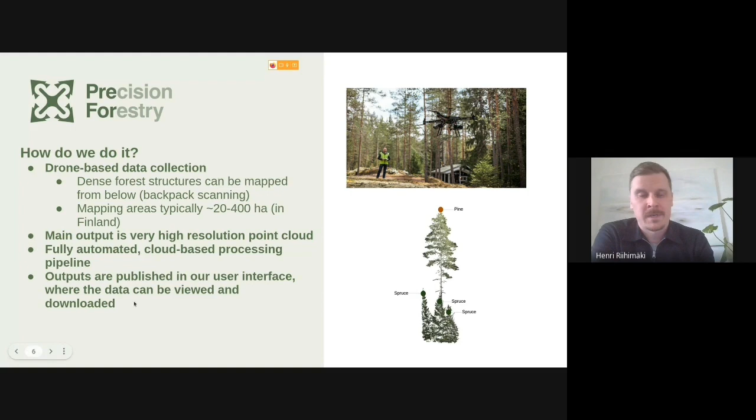In addition to that, we also get the compartments and the data aggregated into the compartments and management actions for these compartments. All of this is visible through our user interface where the data can be viewed and downloaded. The customer uses our user interface where he can see everything and then download desired data formats from there.

With the individual tree level data, we can see that the trees are clustered, and in parts of the compartment we have empty areas, and many other crucial details which can, for example, help in the planning of logging operations. I truly think this is really useful information, and it also gives us the opportunity to use any kind of geometry that we desire.

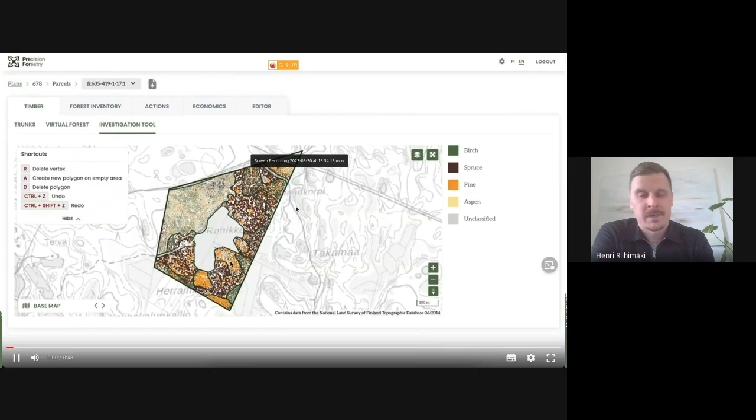There's no limitation in that sense, and we have also developed a tool for that. Here you can see our user interface and an example of the tool we've developed. Here you can see a compartment. The dark lines are the boundaries for a compartment, and let's say the user is interested in some specific area inside that forest and wants to check what kind of wood he has there.

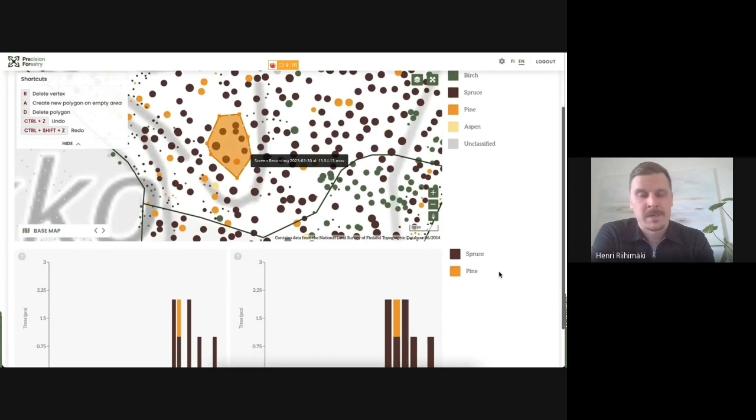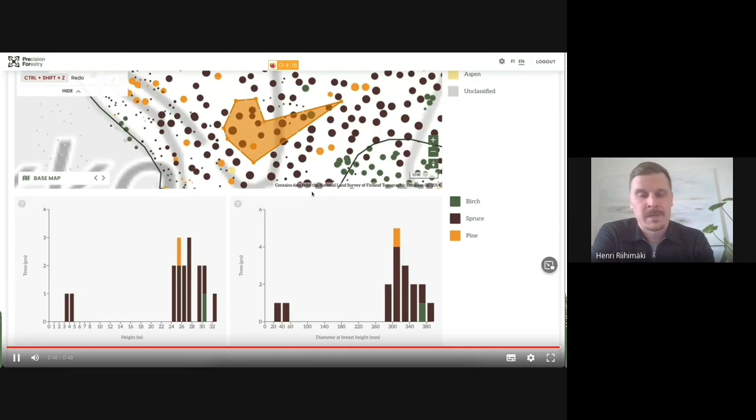By using our map functionality, the user can check in real time any given area and the tree size distributions. You can see the histograms showing the diameter distribution and height distributions, and they are automatically updated by the geometry the user gives to the interface. That's the whole point really.

This individual tree level data can be aggregated to any geometrical unit that we want to use in decision making, and that's really the key benefit from this.

Then the clear benefit we can also get is increased accuracy. By using this kind of high precision mapping, we are able to reduce errors compared to traditional methods. Our internal aim is to be below 5% error at compartment level in the key metrics, which include trunk count, volume, and basal area. Species detection accuracy for the Finnish use case is also 95%, so a 5% error margin there.

Luckily for us, Finland is a nice area to test this because we only have 3 or 4 main tree species here, but in that way it's good for us. We are just finalizing the evaluation of the inventory accuracy, and it's looking quite good. We are really close to this 5% error margin at the moment based on the latest internal data.

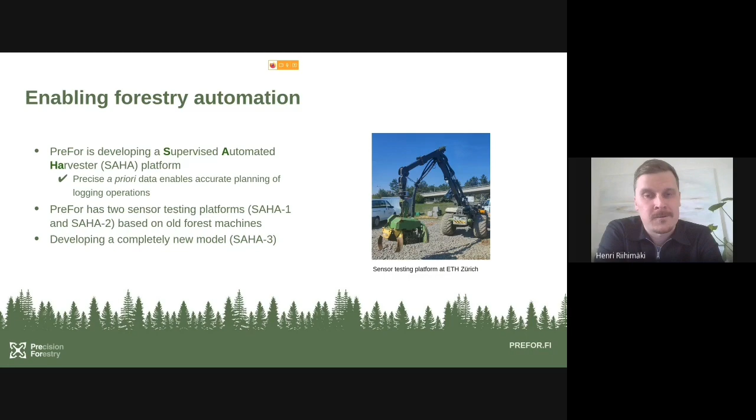And that's it from my part. Thank you very much for your attention.

Thank you very much, Henri, for a very interesting overview about your research and for sharing your work and your tools. There have been some questions in the chat, and one colleague was wondering on the tree level, how well can you distinguish different tree species in mixed, even canopy stands?

Well, in Finland, it's above 90% in most of the cases, depending on the situation, quite a lot. So overall, I would say it's between or around like 92 to 95%.

And this leads directly to the next question, which was how many tree species can you detect? And do you have more information for the individual tree, like the volume, the dimension, any other aspects related to biodiversity, which I think you mentioned already, but maybe you can give some more insights.

Yeah, so the basic attributes that we have for trees are tree height, crown width, starting point of the canopy, basically the height of the first living branch, tree diameter at breast height, sawlog volume, fiber volume, energy wood volume, and the total volume of the tree as well.

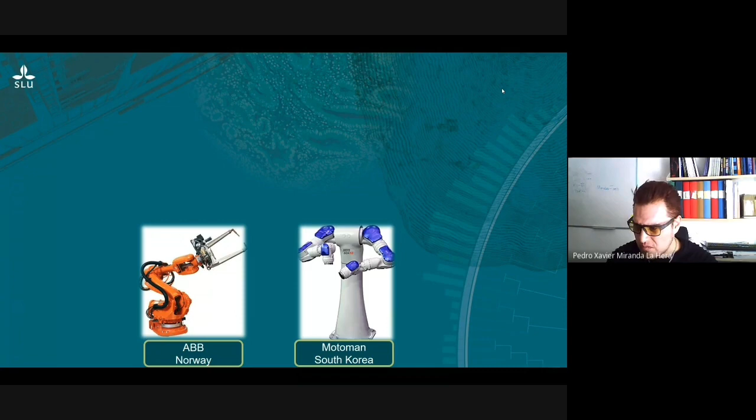Before working with forestry machines, I used to develop control algorithms for different robots, for example industrial robots in different countries, as well as different control algorithms for more complicated systems that we are interested in developing in the robotics community.

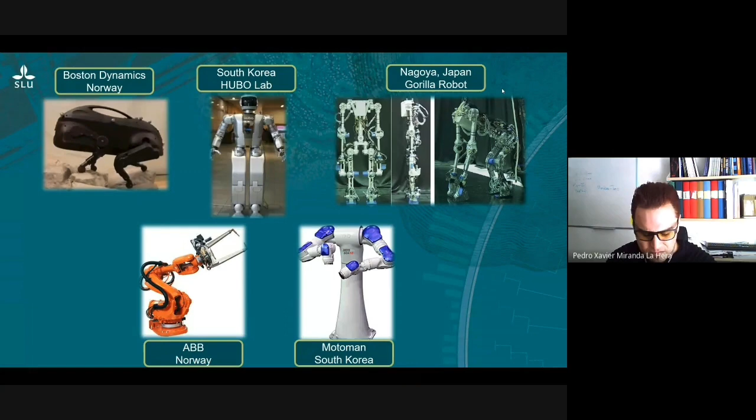But when I moved to Sweden, I became quite known here because I've been developing automation technology for hydraulic machines, specifically forestry machines. Over the years, I started a lot of different projects that ended up being products we can see today in the market from some of the most well-known companies out there, like Komatsu Forest, John Deere, and so on.

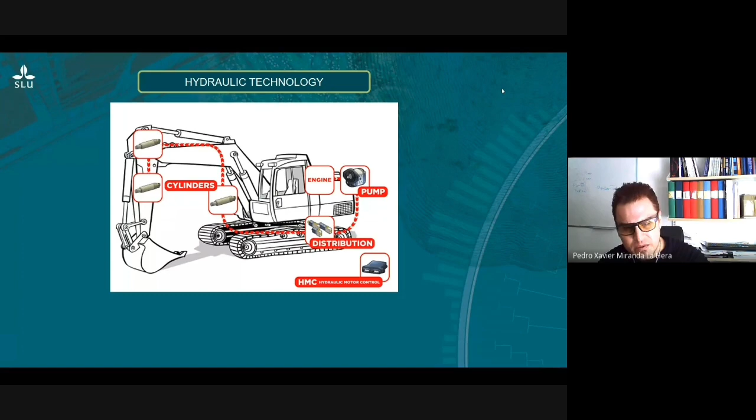As most of you know, forestry machines are basically operated through hydraulic technology - they have cylinders, pumps and so on. But there is a problem with most machines today: they don't really have real sensors, and by real I mean sensors that you can use for automation.

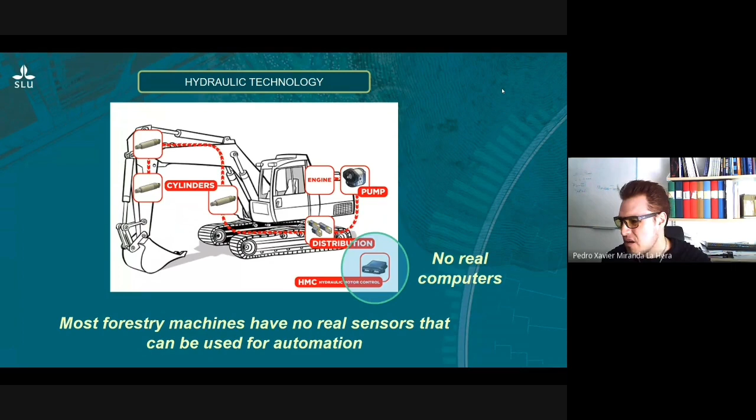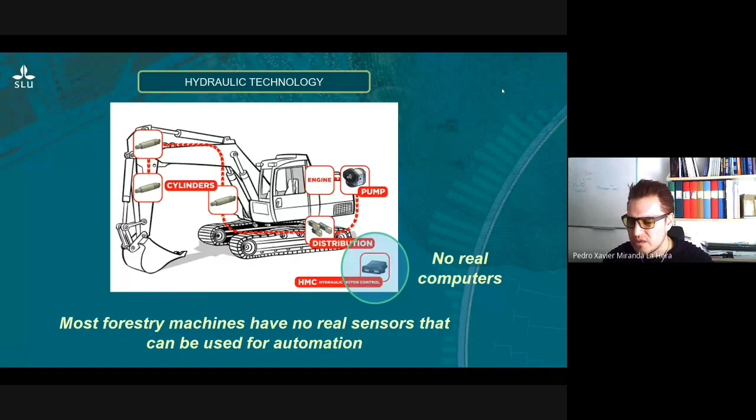They have some sort of sensors, but they usually cannot be used for automation. The second problem is that they have no real computers because they are usually manually operated machines - you don't need so much advanced software or computers to operate them. So there is a lack of technology in these machines.

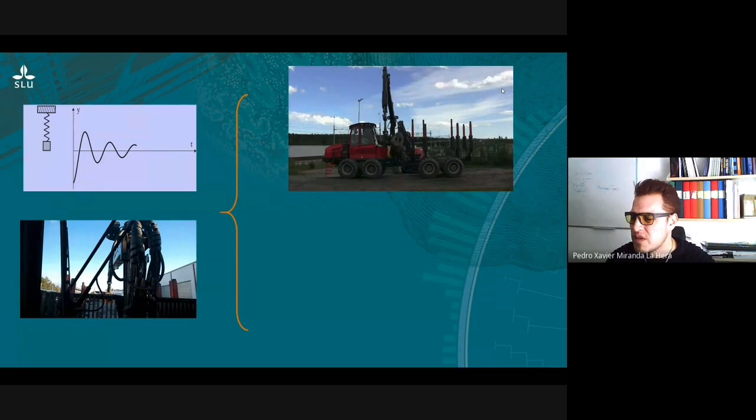The problem with that is that by nature, most of these cranes have this very bouncy behavior, which you can observe when driving the machine yourself. There will usually be a lot of oscillations and vibrations. That can provoke that whenever you try to do precise movement with these vehicles, you might not be fully able to do it unless you are an expert.

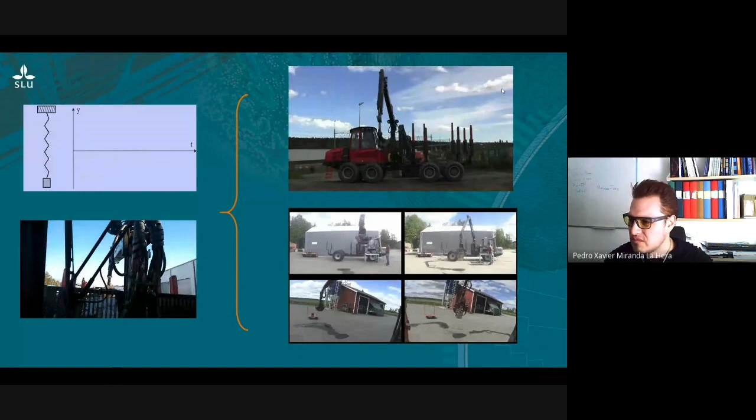One of the main reasons is that hydraulics hasn't really been developed as a method to fully actuate these kinds of systems. Originally, hydraulics were developed as suspension systems, so the technology to move heavy loads is kind of not too advanced in the hydraulic industry. One of the challenges I worked on for the last two decades is to transform these very uncontrollable oscillatory systems into something that can be controlled just like a robot.

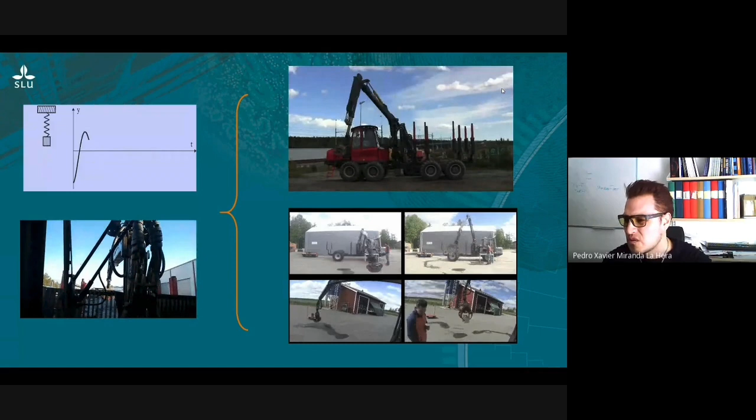And everything starts by introducing sensors on the machine. On these machines, over the last decade, specifically in 2013, the company Eaton released the first version of a fully sensorized valve, meaning this valve is not only capable of producing pressure and forces, but can also measure everything going on in it - pressure, flow, electrical lines, and all of that.

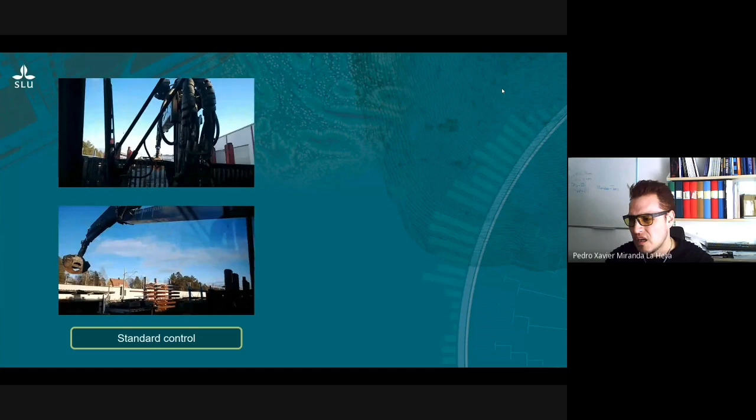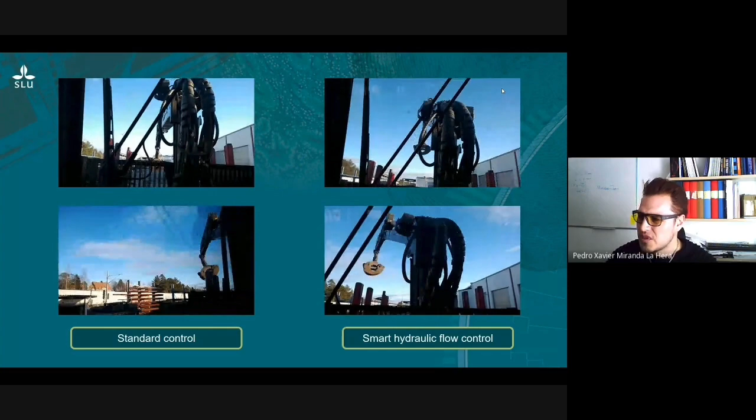We were working with this company for kind of a long time before they released this product. The research behind it was specifically to transform this oscillatory behavior on machines into something a lot nicer to control. Once you start programming these machines using sensors, you can eventually start controlling them more accurately, pretty much like the way robots work today.

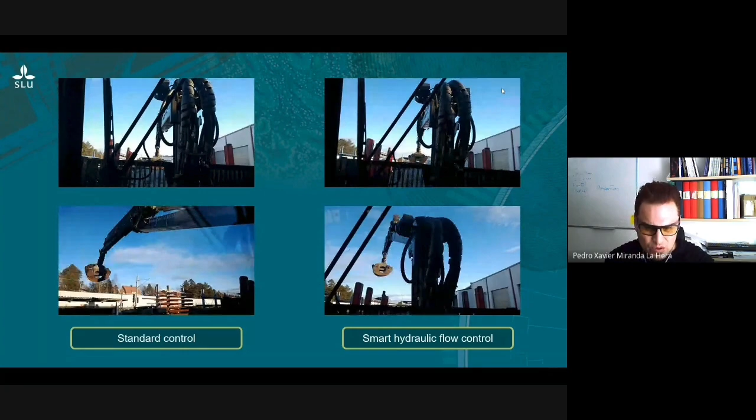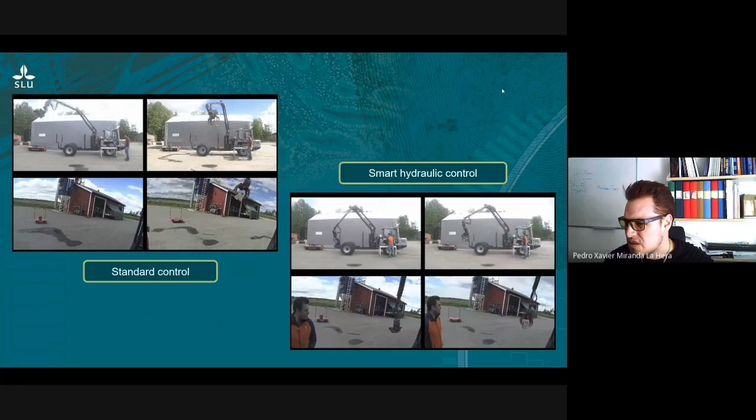These are experiments done almost 15, 16 years ago. Some of the most recent experiments, just a decade ago, could transform these very small, non-sophisticated machines that have this very wavy behavior into something a lot simpler to control. This helps the machine operator a lot because it doesn't provoke the machine oscillating all the time, making it nicer and more precise to work with the crane.

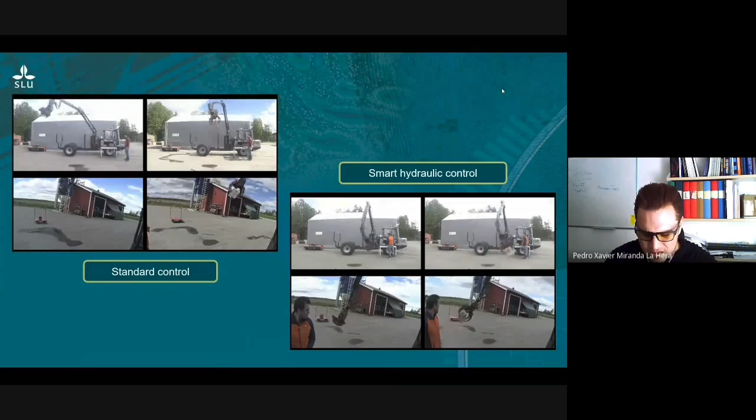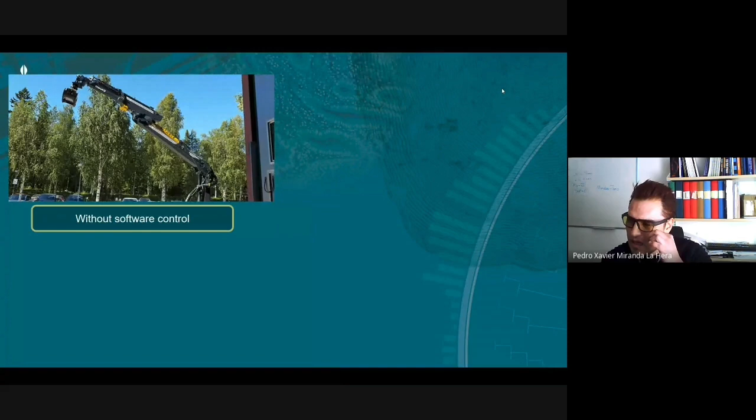So all this development was transported to the Aura machine. Originally, you can see here the crane working, and without any form of software, this crane or machine itself would be very oscillatory and vibrate a lot, which is not something you want when there isn't a person in there, because the whole machine can tilt over. But the machine itself has a lot of sensors.

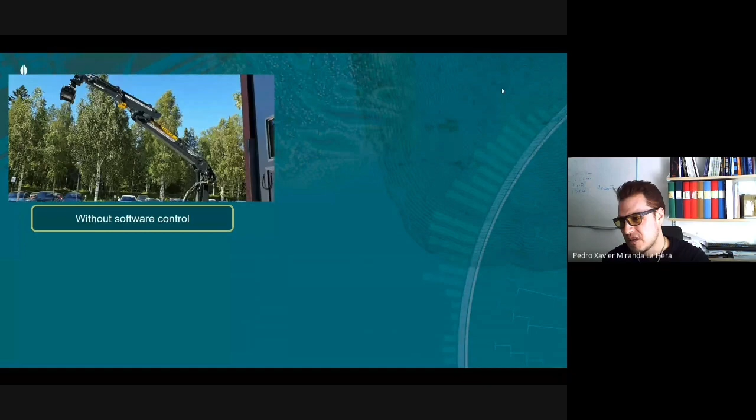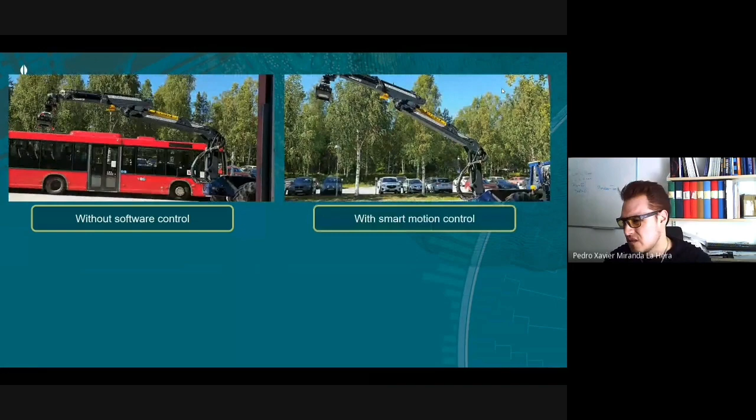So the valve is a very complex valve, and it has sensors for measuring the flow, the pressure, and most of the stuff that we are doing with it. So using the technology that we had before, well, improvements of that technology, we could transform that kind of very heavy oscillatory movement into very precise control, as you can see there.

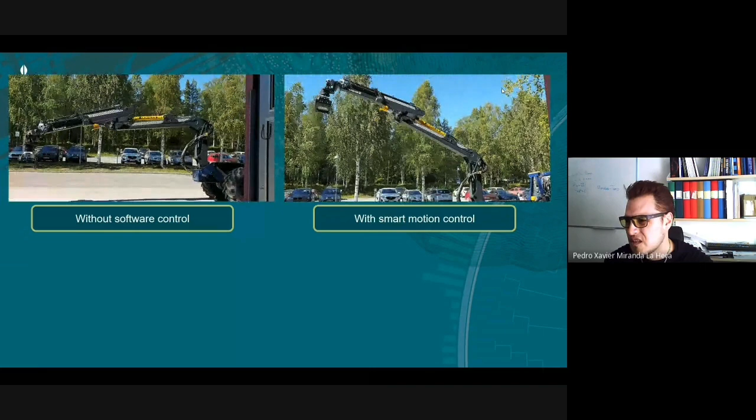So on the left, you can see the oscillations when no control is being applied. And on the right side, you can see a machine learning algorithm that knows that this should not be happening.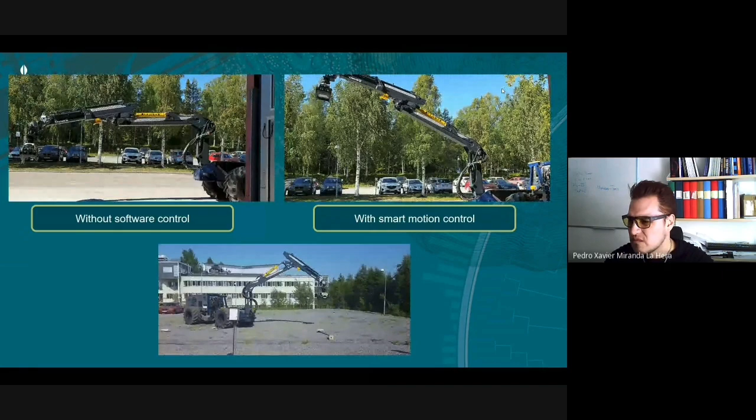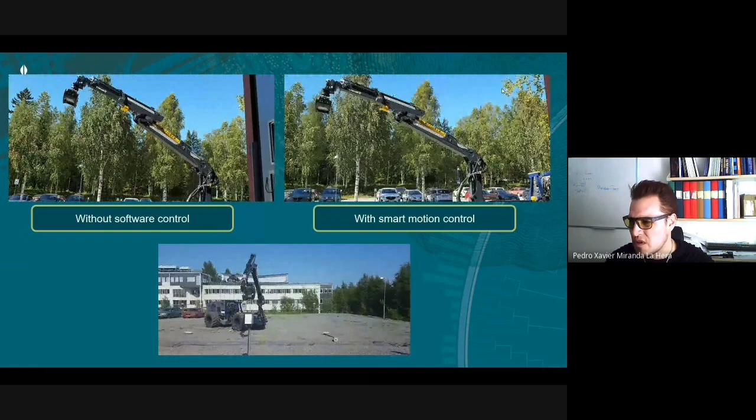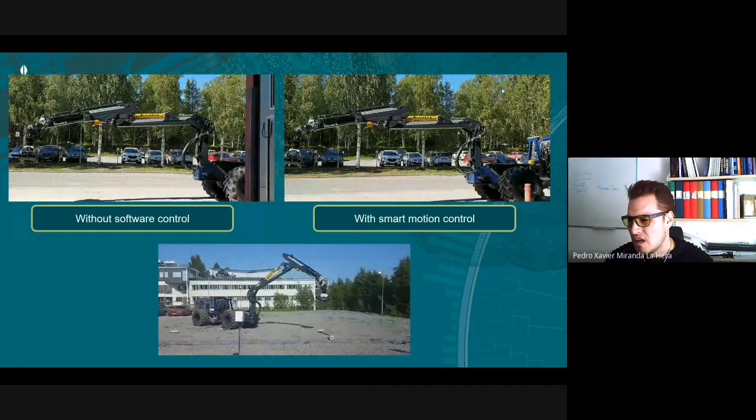So this becomes also important for the crane itself when it's moving. In this point you see the crane doing very fast movement, and here you see when it's not controlling it. So in this case, the machine has the ability to learn that there is something provoking this kind of very distorted oscillations, and it starts learning that it needs to move differently to the point that no oscillation is going to happen.

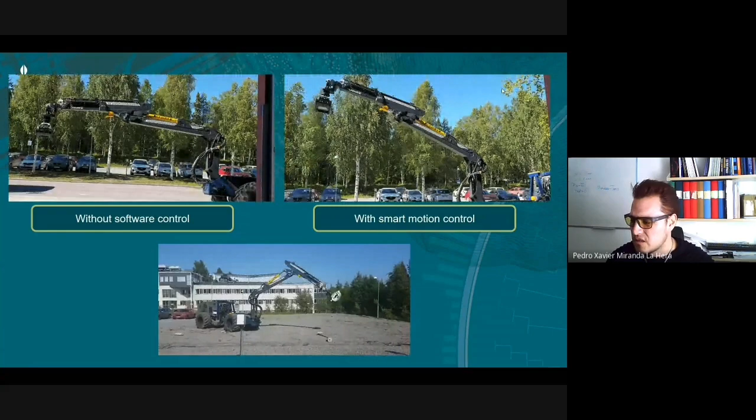So this part would be the first part in which you can start taking hydraulic technology into something that becomes simpler for control system people and for people in robotics. So it becomes more suitable for them to be able to use in automation.

So based on this kind of developments, specifically in the year 2011, one of our companies in Sweden started launching the first forestry cranes that had fully embedded sensors in the joints. And what this allows you to do is to measure every single position in which the machine is moving, so it allows you to measure movement.

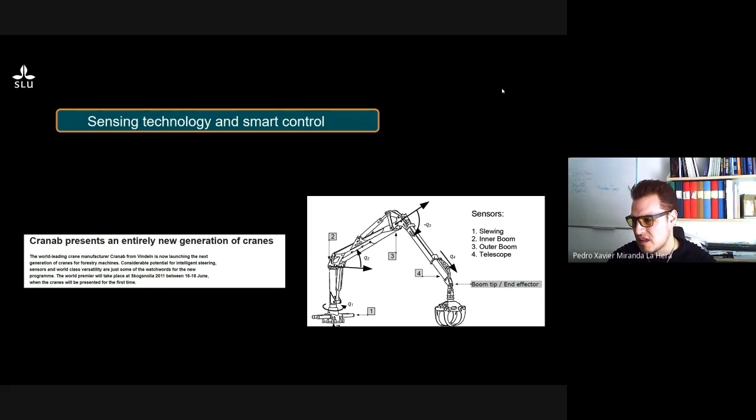And by measuring movement, you start transforming this crane into something that has eyes, pretty much like a human. So I will show you some examples that were done very long ago, in which, for example, you want a crane to move in a very specific path.

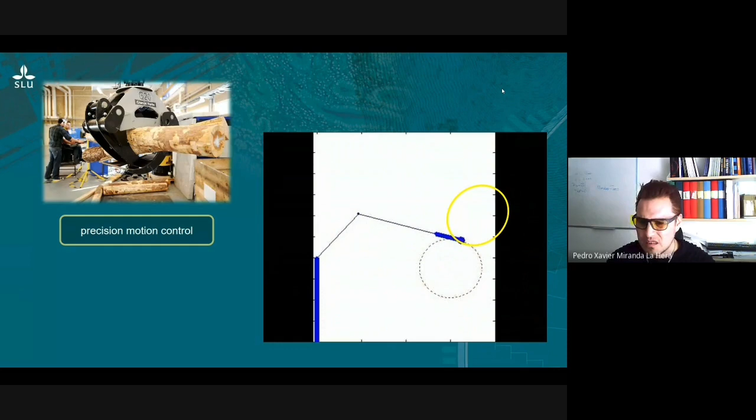And by using the positions, the sensors, you can develop a control algorithm that is capable of doing so. So you can plan something and then the crane itself can do it on its own, as you can see there. So these experiments were done about 20 years ago in a laboratory setup.

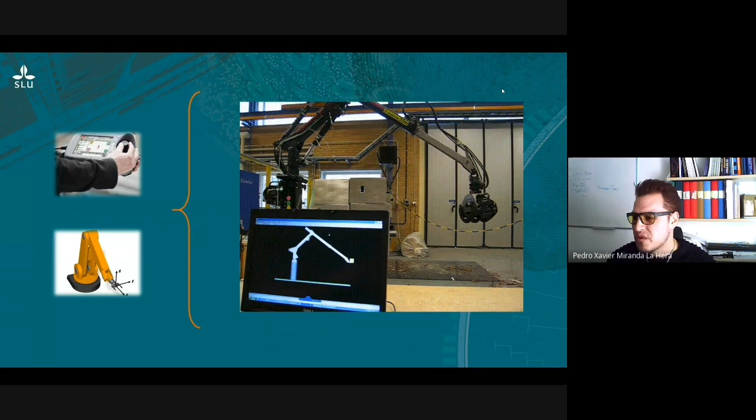Some other examples in the same setup showed the ability to just pick a point wherever you want the crane to move, and the crane will just, well, magically start going to wherever you want it.

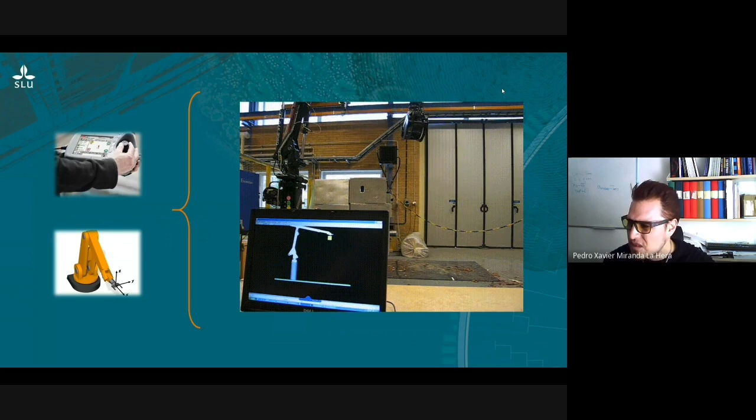And this is a technology that exists today in the market after 20 years of development, known as the intelligent boom control in the case of John Deere, the smart crane control in the case of Komatsu Forest. And there is a lot of companies selling similar developments today.

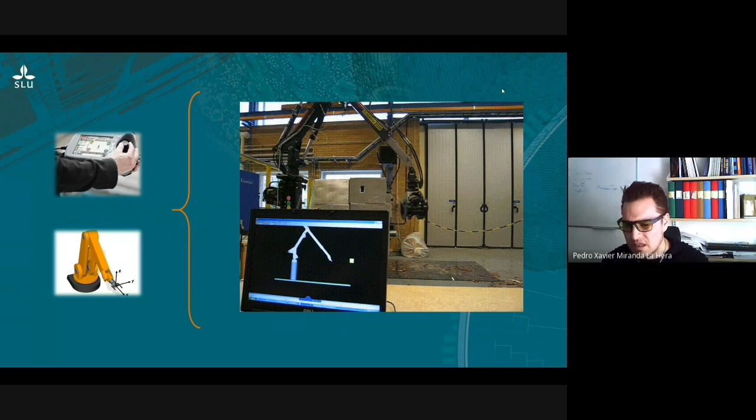And what we do is just program in it. So this crane is equipped with all the sensing technology that is almost equal to the crane itself. And we can do pretty much the same experiments with more advanced control algorithms, as for example, the ability to move the crane specifically the way you want it, so very accurately, as you decide.

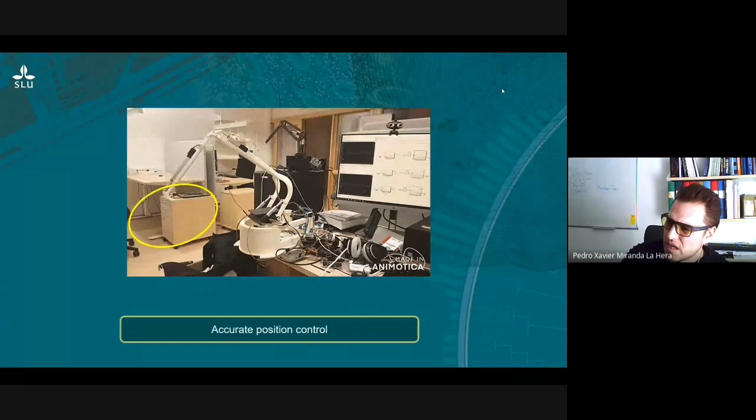And eventually this kind of accurate position control is something that we have programmed in the Oro machine itself, because the Oro machine is one of these crane cranes that has all the sensing equipment in it. And based on these sensors, we can develop control algorithms that can actually make it move the way we want.

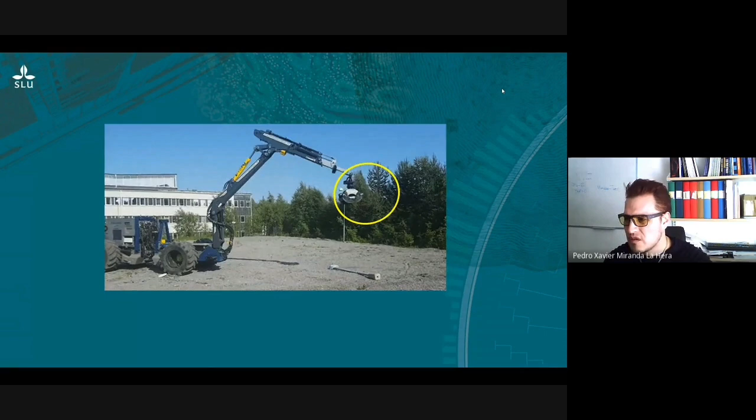So now from this point forward, you need to think that if you can smoothly control this machine and you can make it move the way you want it, then the next question you got to answer is, how do you want it to move if you are in the forest?

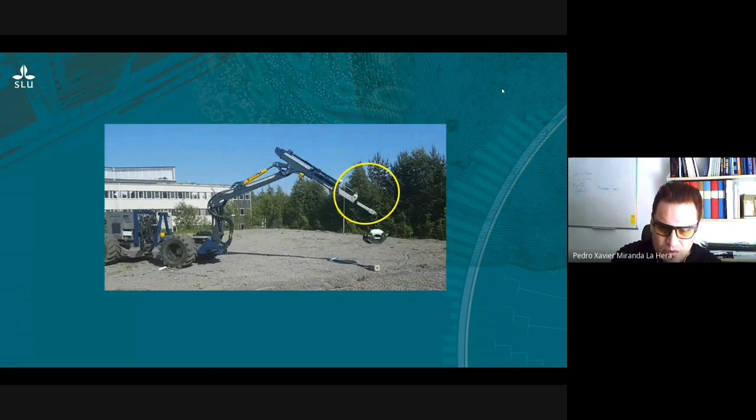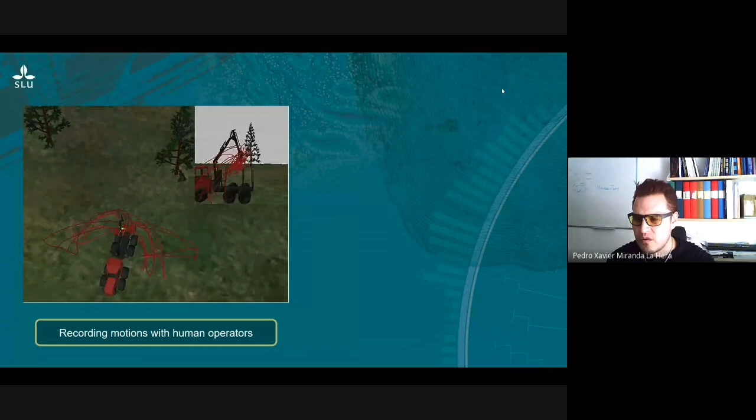So because the machine has sensors, or well, we implement sensors on some machines, about 10 years ago we had the idea of recording how people are working. So here in this example, you are seeing the data of a person working in the forest with the crane. And because we have sensors on these cranes, we have the ability to record everything going on from his hands, from the control of his hands. And that gives you an indication of how people are actually working.

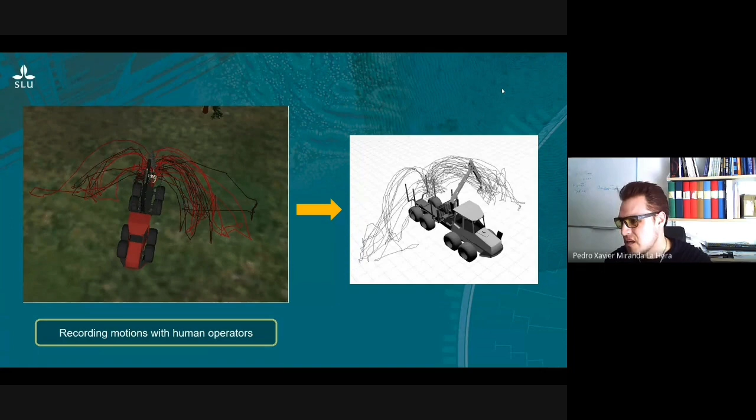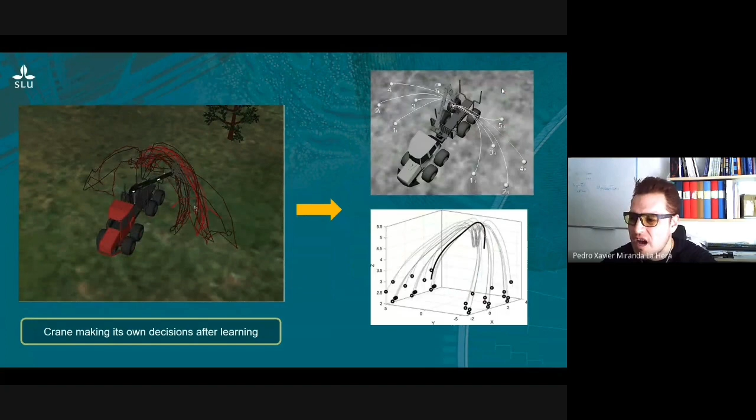And because you have data, eventually what you can easily do is use a machine learning algorithm that, after learning from the person, starts doing the whole job on its own. So you can see it in this case that now the machine has learned from the person and is starting to develop. The machine now is deciding everything on its own.

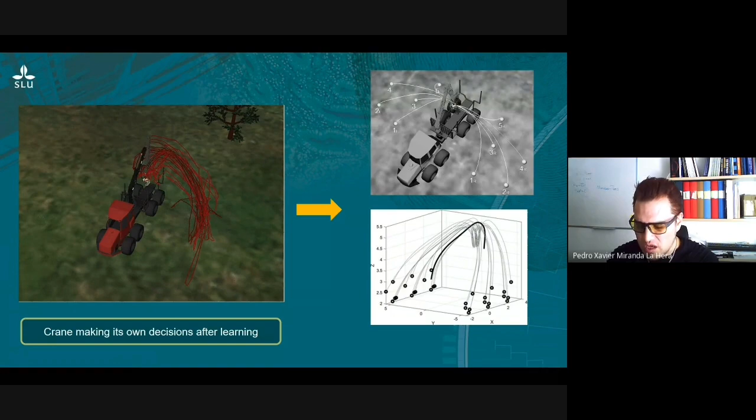So all of these kinds of controllers - now you've got the control algorithm, the pressure controller, smooth movement, and now an ability for the machine to move in the way it wants, in the way you need. So basically combining all of this is what we have in our machine, so that the crane can start doing work on its own.

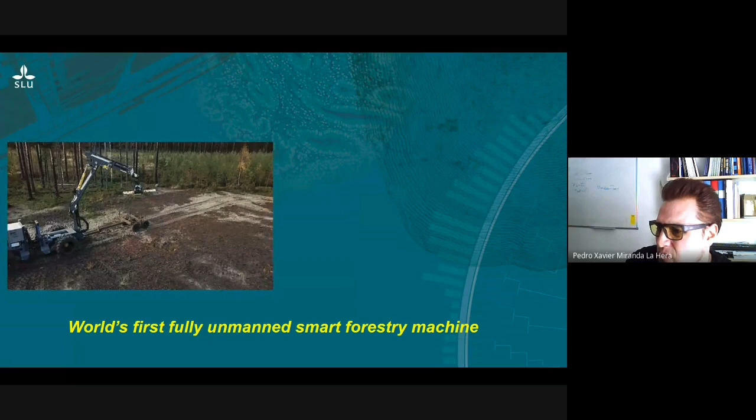In this particular example, which you can see in the complete video on YouTube, after the machine is able to detect that there is a log to be collected, it has the ability that on its own it can go grab it and bring it to the trailer, just the way we programmed it to do.

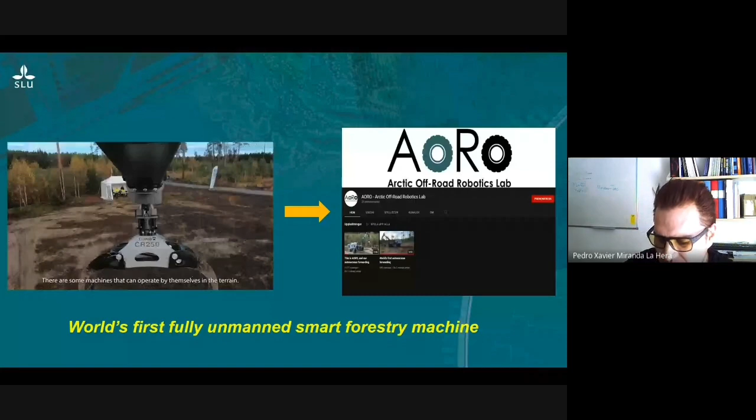So all this kind of development is something that has been going on in the AORO platform, but the AORO platform has much more than that. It has the ability to autonomously navigate, to observe the terrain, it can recognize trees around, and it can drive on its own.

But that is development that I'm planning to present on another occasion, because as you see, every part of this development is pretty long - it's not something done in just a couple of months. It has history. The development of autonomous navigation, tree recognition, and computer vision - each one of them has its own challenges.

So that's everything that I have prepared for you. Thank you for the attention, and if you have any questions, I'm pleased to answer.

Thank you very much, Pedro. It was quite impressive to learn about the history of development, what you just mentioned and showed to us, and also to see how your lab is equipped. That's quite impressive, thanks a lot.

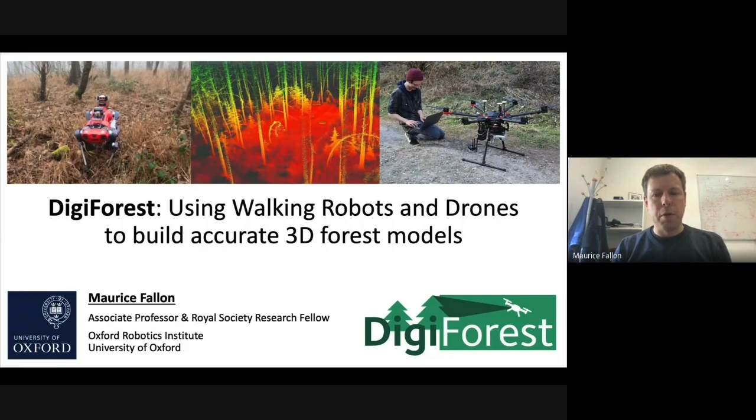I'm going to use this as an opportunity to introduce the DigiForest project, which Henri mentioned before, and go into detail about the initial progress of the project. DigiForest is a 3.5-year European-funded, Horizon Europe-funded project looking at improving and developing technology to digitize and improve informed forest management decision making. It's a large variety of different systems being developed by a variety of different collaborators across Europe, with several different strands, some of which Henri has mentioned.

There are 4 major ambitions. One is to create autonomous robotic systems, both legged and aerial drones, above and below canopy, that do mapping and reconstruction down to individual tree level, as Henri talked about, feeding those different sensor sources through to decision support systems. Different robotic platforms may be more practical at this stage, but we're developing a variety of technologies in parallel. For example, above-canopy drones are more likely to be commercially practical given the number of hectares they can cover, but within the aims of the project it's quite broad. Finally, feeding into the harvester, which I won't talk about much today, but Henri alluded to a little bit. I'll mostly talk about the first 2 aspects today.

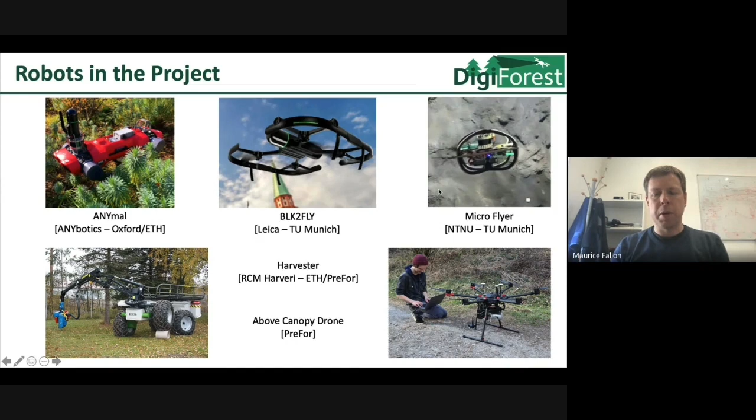This is an illustration of the different robotic platforms we'll be using in the project. Drones from 3 different partners, including this integrated drone developed by Leica, and a more focused aerial platform - actually I don't think this is the preferred platform from PreFor, but it was one used in a recent trial. This legged robot, which I'll talk about a bit later, and a custom-designed drone developed by partners in Norway, NTNU Norway, and co-developed now with TU Munich. We also do a lot of work with backpack portable mapping, to ease data collection and build out sensor fusion aspects.

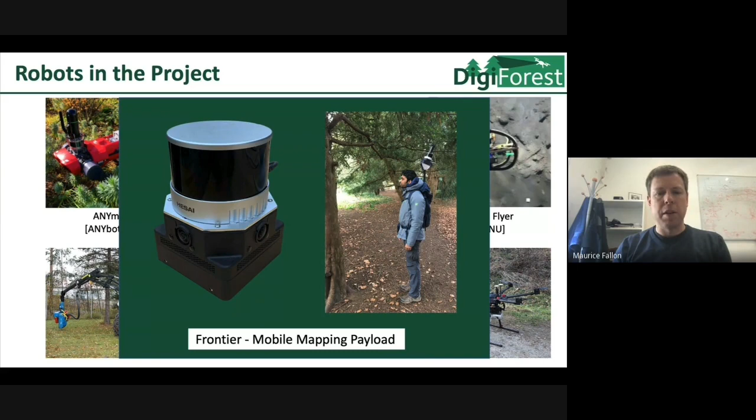The project's goal is to improve digitization and feed the map reconstructions into subsequent post-processing operations to do species classification. There's a specific focus on the robots being lightweight and minimal, and the harvester itself being sustainable, perhaps with a focus towards continuous coverage operations.

Now I'm going to shift to talk a little bit about the 3D mapping technology we developed. I'm a roboticist by background, so I'll talk in some technical detail about the methods we use. You can see an illustration of an earlier version of our backpack device on the left-hand side, and the legged robot ANYmal, developed by a Swiss company called ANYbotics that we're using in the project, and the variety of different sensors on board.

Typically, the workhorse for LiDAR scanning is a laser that you can see on top of the handheld device here, but we're also capturing multi-view camera, for example to do species classification, and also to generally create a richer mapping environment. A key sensor at the heart of the device is the inertial measurement unit, which is key for measuring high-frequency motion. The legged robot augments that with sensors for mapping the ground and joint sensing. A piece of technology we've built is infrastructure for earlier versions of this legged robot to combine its onboard joint sensing and vision to track its motion very accurately.

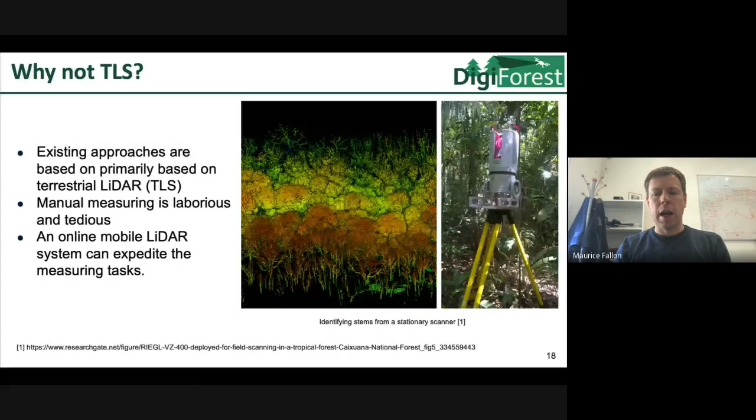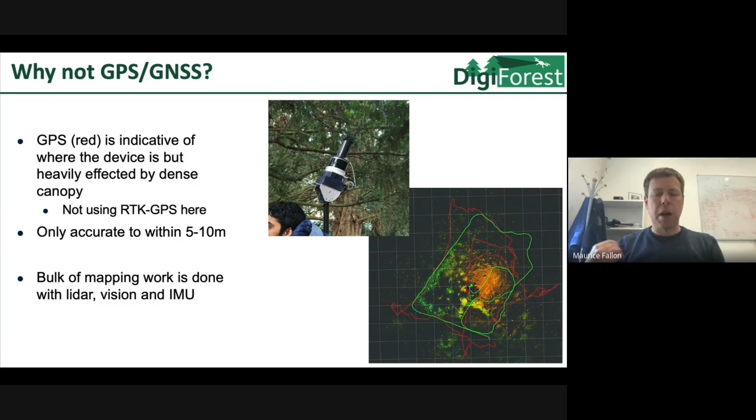So really we rely on the onboard sensors, the IMU, the vision system and the LiDAR to track the motion of the device, and then use GPS primarily to indicate where in the environment it is. We want to do more with that by using lower level constraints from the GPS, fusing partial observations over time, but at the moment the bulk of the work is done with vision and LiDAR.

Here's an illustration of the system running live. The map is being generated on the handheld device carried by one of our researchers, going through the woodland, and you get a feel for what that's like to do on a daily basis, particularly in May and June when, in Oxford anyway, foliage is at its highest. This visualization has been transmitted by Wi-Fi back to this tablet, and in typical operations the operator would hold the tablet to make sure they achieve full coverage and don't miss any patches.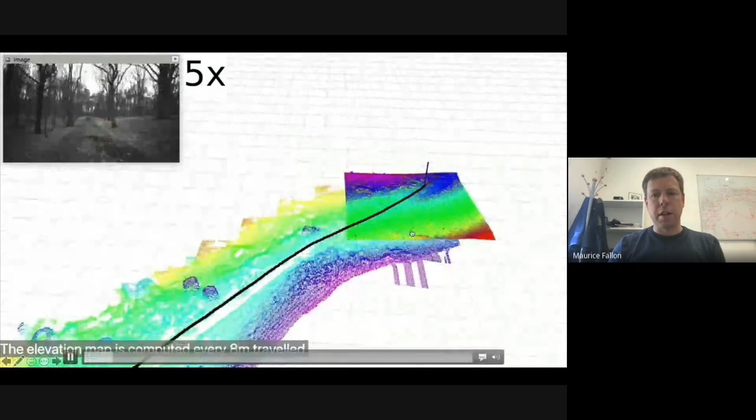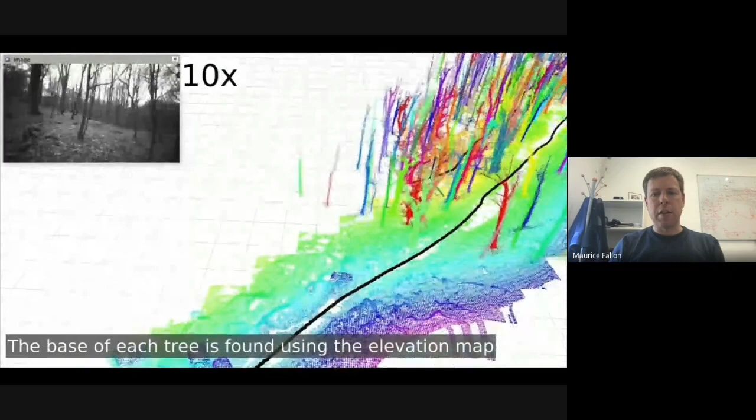Achieving complete coverage, we can then do things like mapping the terrain. This involves extracting the terrain and filtering away the trees to give information, for example, about drainage patterns or the most appropriate ways for harvesters to approach a particular stand, extracting individual trees, and as we go through the EU project, implementing more of the species classification and quality evaluation that Henri was talking about earlier. This is an illustration of individual tree diameters, locations, and principal axes.

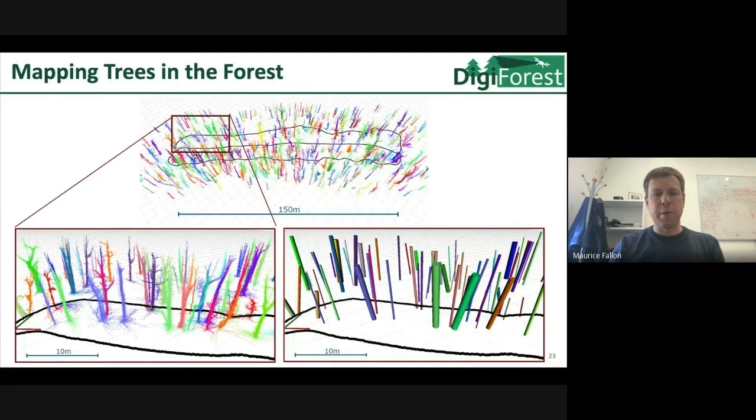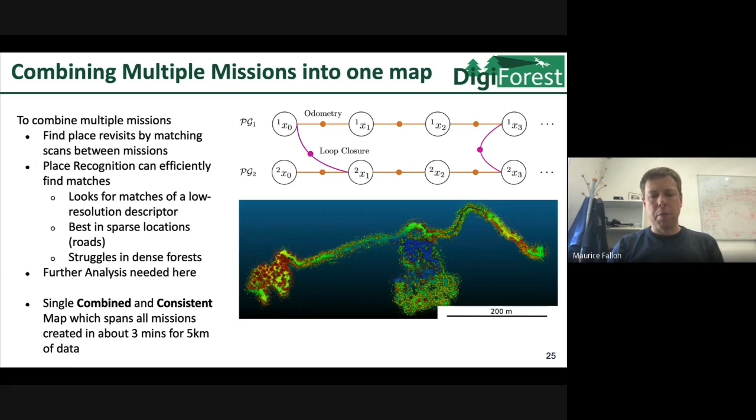We're also scaling this up, so you can see here an illustrative map of as much as 5 kilometers of walking being combined together into a single consistent map, where GPS is only used to situate the map within the world, but not to actually influence its shape or reconstruction.

Now I'm going to shift to talk about a different topic that I'd imagine is quite different to what you would have in this particular type of workshop. Another strand of the work is to incorporate legged robotic systems. This is an ANYmal robot developed by Anybotics, and as you can see from this very short clip, the robot is capable of walking in quite complicated terrains, typically terrains in which the environment doesn't contain natural growth.

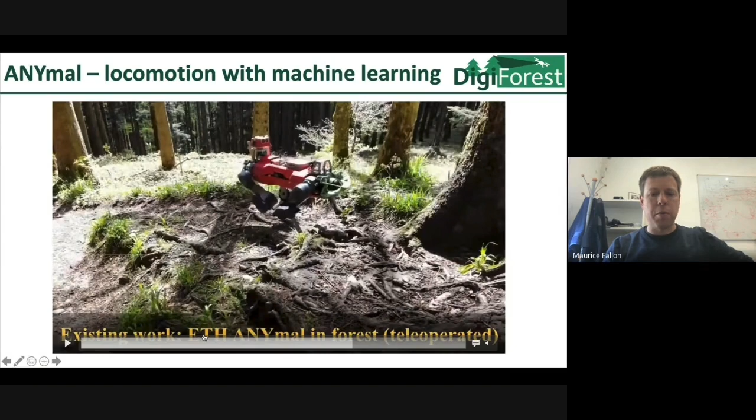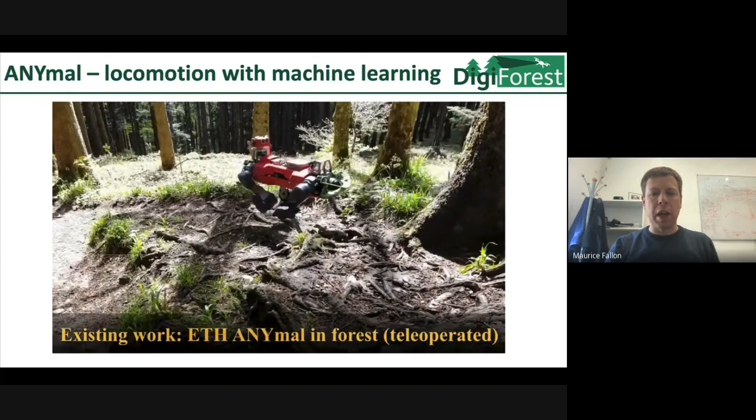The work from the ETH group in particular has developed reinforcement learning-based locomotion control that allows the robot to have a very reactive ability to recover itself when walking in rough trip hazards, like you can see in this illustration, but really struggles when you move into environments like this.

It's using the cameras around its body to determine where the terrain is and where it should plan to place its feet. Soft growth like this, where the robot can definitely pass through, actually confuses the robot and fools it into thinking that this environment is not traversable. This is what the robot's eye view is, and it wouldn't be able to plan its route through that.

So an initial piece of work within the frame of the DigiForest project is looking at how we can use visual information, which is notoriously difficult to work with typically in the wild, as a training signal when a human is first tasked with teleoperating the robot for a few minutes in an environment.

We can learn where the robot can safely walk, and as you see in this video, eventually after just a few minutes of teleoperation and a few loops, the robot is now able to distinguish, purely on a visual basis, between what it can and what it can't walk through. Without any manual labeling or pre-classification, it's clustering out the segments that correspond to untraversable bushes and trees, by example. This is an illustration of that over the course of a 4-minute training operation. After about 2 or 3 minutes, it's able to determine that.

So we're able to bring a robot into an environment where lighting conditions are very evolving or unpredictable. We're not taking advantage of prior training as a result, and we're using this kind of GPU-based mobile supercomputer, the Jetson Orin, to do real-time deep learning and deployment on a robot.

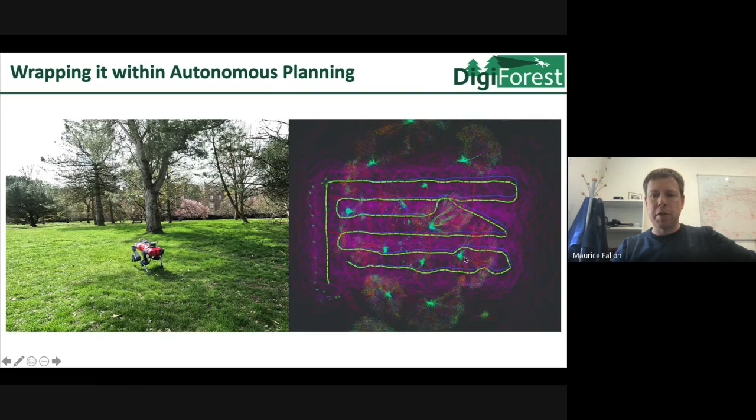Initial work that we hope to further deploy in field trials that Henri is hosting in Finland this summer is to wrap this into an autonomous exploration system. You can see here some illustrations of a lawnmower pattern type mapping, where the robot is broadly following a lawnmower pattern to ensure coverage, but as needed, is deviating to avoid obstacles, large trees that are in its route, for example.

We have different sensor types: terrestrial, backpack mounted, above canopy, and we'll augment that with below canopy as well as legged robot, evaluating their accuracy relative to the gold standard, which is the TLS. Thank you for the opportunity to present and give an overview of our project. It's only getting into the first 6 months now, and we're excited about where it will go next.

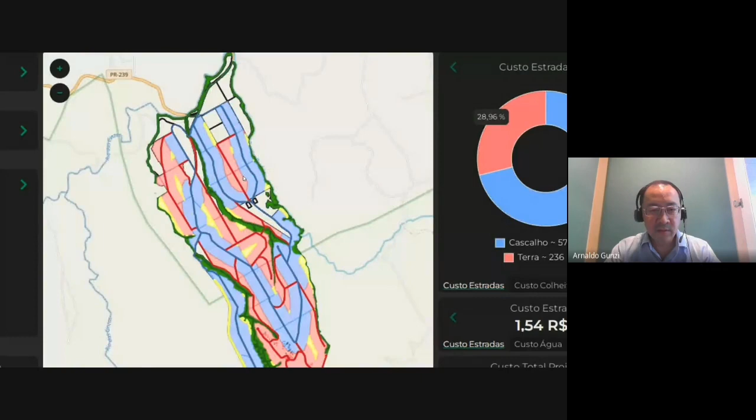It is a software that receives this information, the current roads, a digital model of the terrain, some characteristics of the soil, some operational constraints like the maximum declivity that a hauling machine can operate, maximum distances, and so on. We input these characteristics in the tool.

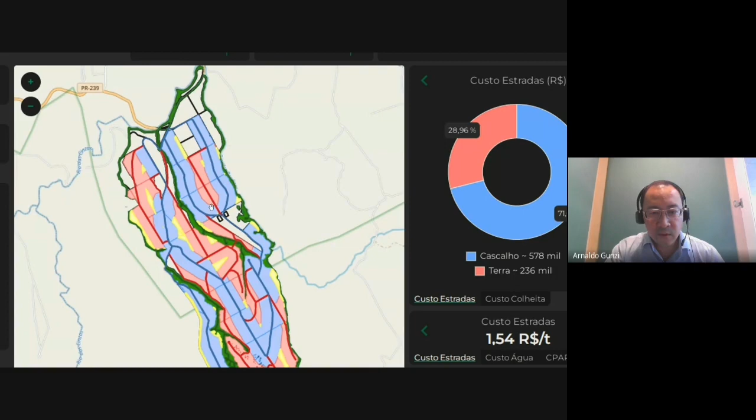It calculates for each square meter of the forest, the stand, where is the nearest road, and the hauling distance for each square meter of the terrain to the nearest road. And then it generates a map like this one. It says every volume in the blue area is going to the blue roads. The area in red is going to the red ones, and the yellow area here is infeasible, in the sense that it has no solution given the constraints of the problem.

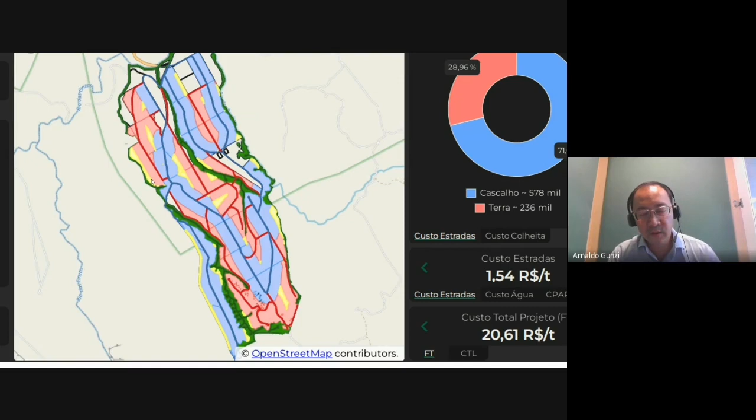Of course, in practice, those small infeasibles are actually feasible, something like this, because we have constraints like maximum declivity or maximum distance, but you can go a bit more in practice.

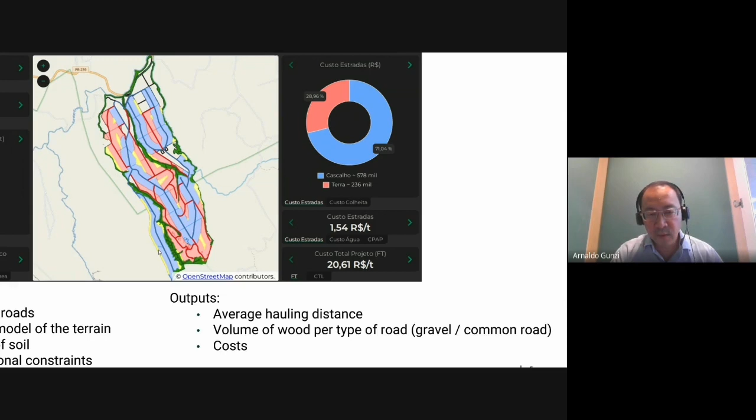And it gives some results: the average hauling distance, volume of wood per type of road. It is very, very important for us in our operations, because Paraná and Santa Catarina are areas that rain a lot. So we have to protect our operation, the wood, the operation of transporting from rain. And for this, we have the gravel roads. So we have to have a good estimate of these volumes to guarantee the operations. It also calculates the costs and some other features of the problem.

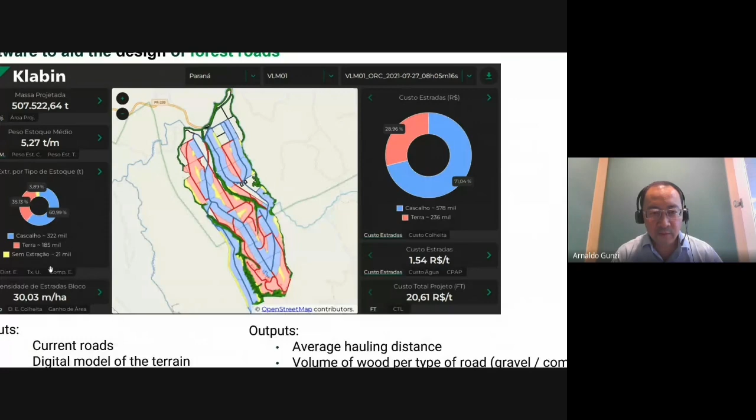One desire of ours is to reduce the number of roads. Our forestry basis is like 70 years old, so in 70 years, a lot of things change. We now have better machines, a better operation. So we don't need to have so many roads in our areas.

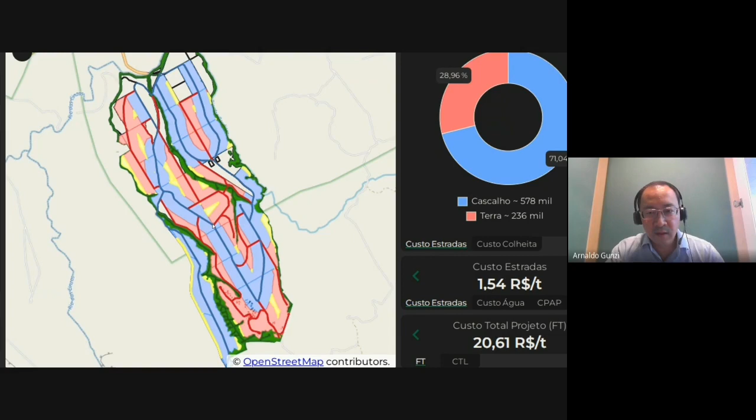This tool helps to analyze the current configuration of forest roads, and the analyst can say, oh, I don't need anymore this branch of the road, and I can redraw this road to make another road configuration. Then we can run it again and see if the parameters are good or bad, and then we can guarantee that we have an operational solution.

We liberated this for road construction or maintenance. It is a work that we have been working on for like 11 years. First we needed the digital model of the terrain, a LiDAR flight. Then we developed some initial digitalization of our roads, and then we were ready to implement this software.

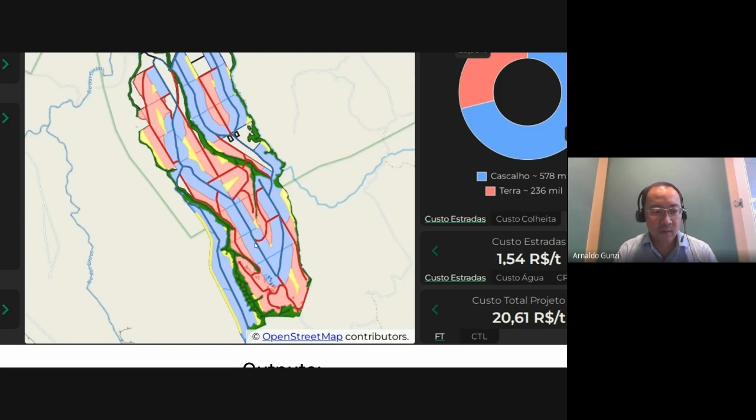It has been running for 2.5 years, about 3 years. And in those 3 years, we estimated that we gained 400 hectares of land that are now productive and were roads before this study. So it is a very interesting problem that is giving some results now.

Another case, a second case that I want to show is about quantum computers. It's a study, I'll explain here. Moore's law is reaching its limit - that's the law that says every 18 months we have a double of computational capacity at the same cost. But in the last years this is not so true, and there is a race to get new paradigms or new solutions. Quantum computing can be one of these new solutions.

In quantum computing, we have qubits, quantum bits. It can be described as 0 and 1 also, but also in any superposition of 0s and 1s in a complex plane. It can be like an electron in an atom - the level of the electron can be 0 in one level, 1 in another level, but it can also be in any superposition of these two. Or also a single photon polarized in one direction, and the direction of polarization can represent this qubit.

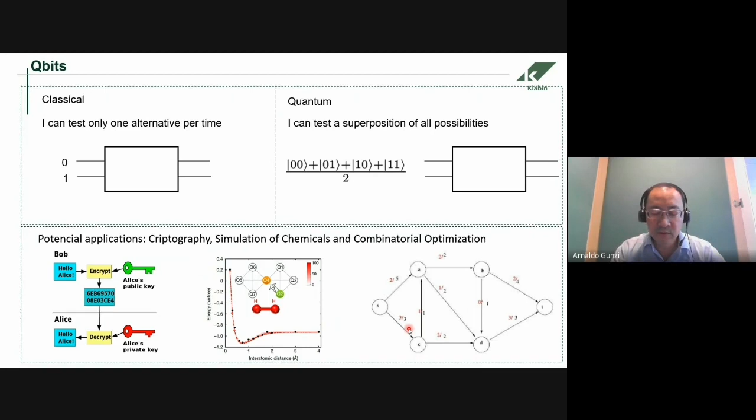But there are some potential applications, mainly these: cryptography, simulation of chemicals, and combinatorial optimization. These are the most potential applications of this new technology.

And what we are doing here in our study is the link to combinatorial optimization, because a lot of forest planning is combinatorial. We are doing a study with a Brazilian university in partnership to study this one problem. We chose a small silviculture planning problem with just some very small parameters - 4 harvesting blocks, 2 species, and 2 months to consider.

And the decision is like, what do I plant in each of these blocks, considering 2 species and a few other constraints. It gives around 16 qubits.

We are using a programming language - there are some programming languages, Qiskit from IBM, that enable you to simulate this kind of algorithm, and also it allows you to run it in a real computer in the cloud.